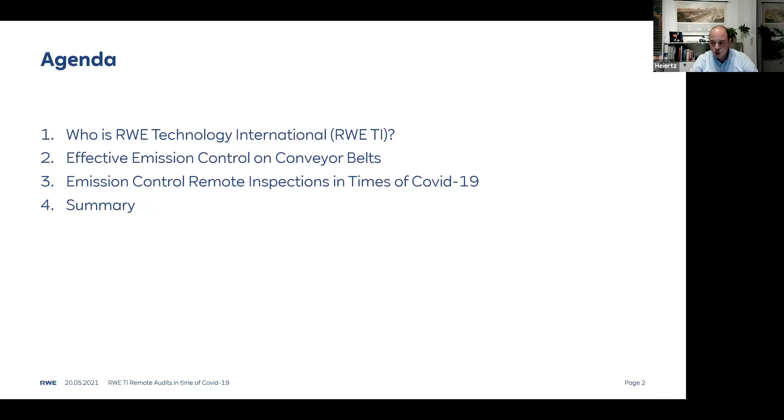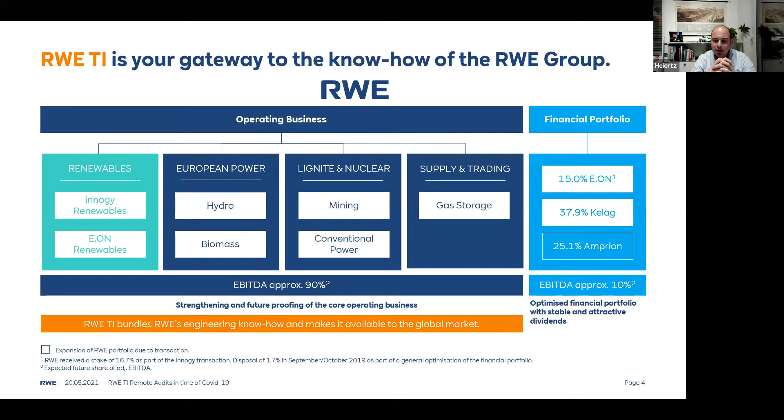This orange bar, RWE TI, that's RWE Technology International, the global consulting arm of the company, bundling all the knowledge of the complete RWE group for international projects. Mostly external clients, but also internal clients like the RWE group itself. In the mining business, it's 99% external clients. We've been serving since 1965 already, mostly the major miners in the market.

Of course, we also have a big maintenance center here. The maintenance center, it's a mechanical maintenance center, which is responsible for the complete maintenance. In this maintenance center, we are also producing products for the Chilean market. Big ultra strong drive pulleys, which are manufactured there, wear protection systems. We have several clients in the Chilean market who are served by RWE with RWE mining knowledge or consulting knowledge, but also with RWE equipment, where the equipment then is manufactured here in this big maintenance center as well.

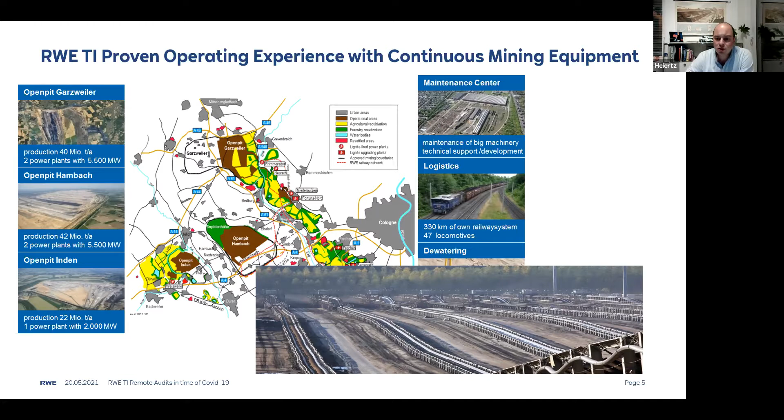These are technologies which are, I would say, very environmentally friendly. With these technologies, you have a good chance actually to reduce your carbon emissions in your mine, to reduce your carbon footprint, to reduce the dust footprint. So these are really good technologies which are getting more and more popular right now. As the deposits are getting deeper, you need to look for new haulage ways, new haulage technologies, and to make the mine more cost efficient. And these are the technologies we are consulting on.

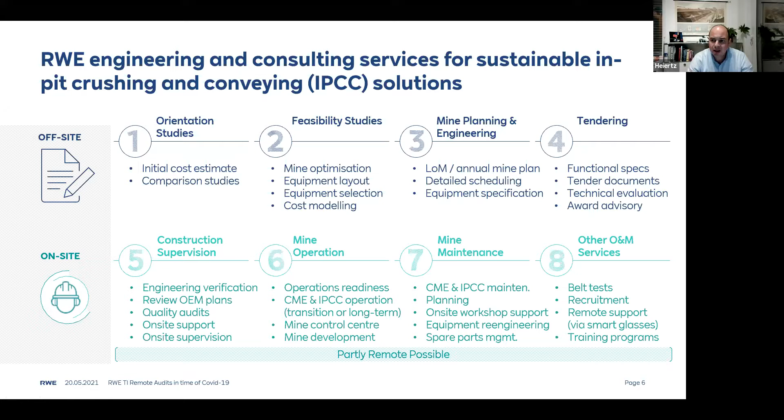So on offsite, we're doing all these types of studies to help the clients to implement things. And then on onsite, we're also doing a lot of construction supervision, mine operation, mine maintenance. For example, here we are with our team, we are quite often in the Chilean mine operations where we're working in to support the mine operators to handle their equipment actually, or to maintain their equipment.

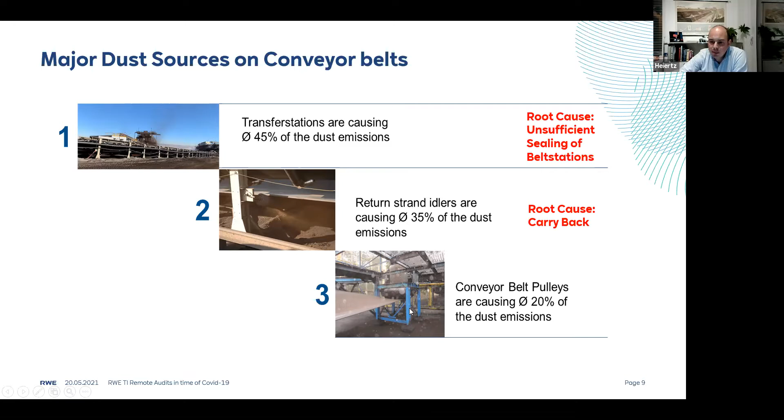The third cause, maybe 20%, are conveyor belt pulleys, also causing a lot of dust emissions. This picture was taken in an operation in Brazil, where we did an audit on conveyor belts, and the root cause here again was carry back on the conveyor belts.

In Germany, we're talking about 2 different ways. We're talking about emission control. That's a preventive measure, where you are eliminating the dust source, and you're talking about immission control as a corrective measure, so you're reducing the effect of the dust on the surrounding environment.

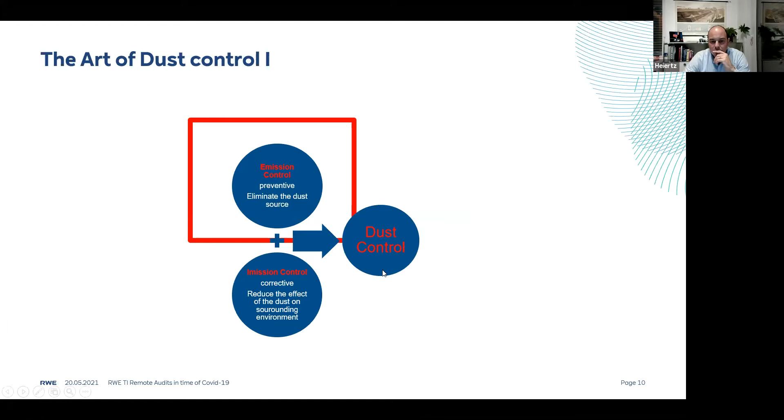And what we are always trying to do, and that's by far the most important and the cheapest way to optimize your dust emissions in the operation, is the emission control itself. It's very, very important that you eliminate the dust source on the conveyor belt. When you control the dust source, you're saving a lot of money on further corrective measures you have to take. And this is the best and optimized way to deal with your dust emissions.

So, as I said, avoid that dust is created. If dust is created, there was a saying I heard many times: a lot of water, for example, helps a lot. And I know, especially in the Chilean operations in the Andes Mountains, fresh water is always a problem. It's always difficult. It's very expensive, the water. This is why we are going with this low water approach into the project. We're trying to use a minimum amount of water with a high surface area to collect the dust.

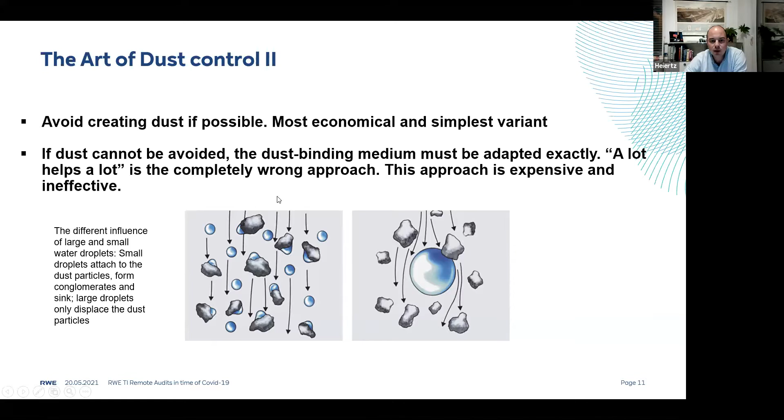As you can see here, when you have a big drop of water, the big drop just drops away from the dust particles. When you have very, very fine water droplets, the water droplets are adhering to the dust particles and bringing the dust particles down. So that's a very, very efficient way for waterborne dust control.

And here you can see, I took this picture, a pretty much optimized transfer station on conveyor belts. You have a nice portal, a properly sealed transfer station with very, very fine nozzle systems using a minimum amount of water, and you have high pressure belt cleaning systems, for example. You have side sealings, you have proper scrapers installed. And this is how it looks after the engineering process.

In the engineering process, that's a designed transfer chute, also for hard iron ore material. And this is a chute which can be nearly dust-free. You can make really dust-free chutes when you make it correctly. So we are involved in this engineering process for these companies. And what we saw there, we can reach a lot of optimization when you put a little bit of work into this topic.

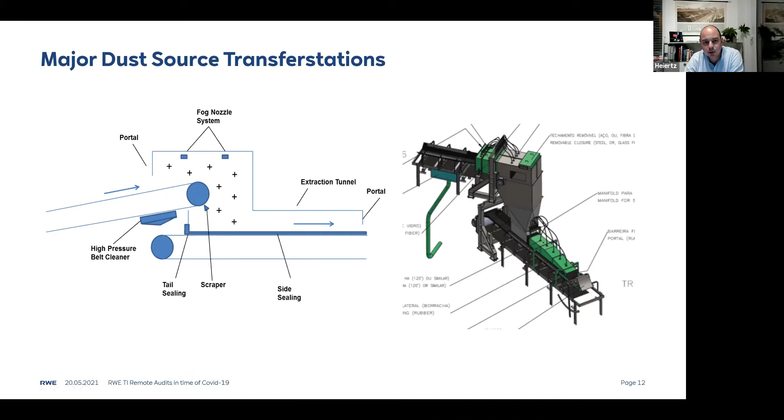So as I said, the minimum amount of water is required. When you see these nozzles, one nozzle has a water consumption of, let's say, 3 to 4 liters per hour.

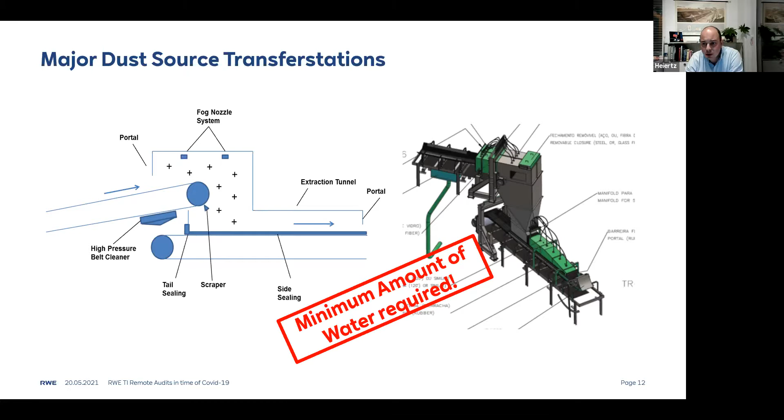So that's a minimum amount. We always know that water is really precious in arid zones and arid areas. So we are really trying to minimize the amount of water here.

That's another topic. One of the major topics is carryback on the conveyor belt. These are pictures I took from our own operations here. When you see this long distance conveyor in one of the major mining companies, you see this diffuse dust which is coming out of the conveyor belt, and how this is created.

What's the dust source? When you see the material flow here, the material is running off the belt, then you still have a little bit of material which is scraped off by the primary scraper, and they try to scrape it off with the secondary or tertiary scraper. But most scrapers are actually not able to clean the conveyor in a proper way. You still have 0.1 to 0.3 millimeters of carryback material still adhering to the conveyor belt.

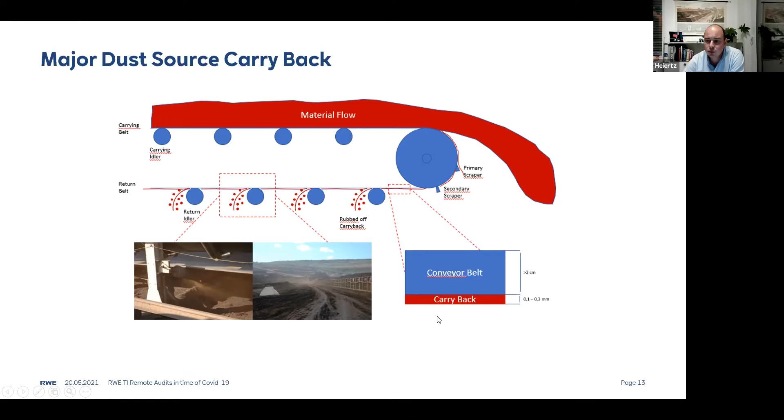And this material is rubbed off by every return strand idler on the full conveyor length. Sometimes with tunnel conveyors, or huge conveyor installations in the Andes, you just see this long fleck of dust coming out of the conveyor strand. And these are things which can be further optimized to reduce dust emissions to an absolute minimum.

One topic here is a thing we invented within RWE, a so-called high pressure belt cleaning system. It cleans the rubber of the conveyor belt to nearly 100%, so that all the carryback material adhering to the belt is cleaned off by a very, very sharp water blade.

It does not harm the conveyor, and it doesn't matter what the structure of the conveyor is, or if the conveyor is worn out, as this sharp water blade is very flexible. And we had very good results cleaning the conveyors and really avoiding major dust emissions in that field.

Coming to the actual topic, remote inspections. Here's another picture; I really like to use these aerial photographs. That's another picture from the Hambach mine. On the first pages we looked from this side, now we are looking from the other side. This is one of the major mine operations, with 130 kilometers of conveyor belts installed.

You can see the conveyor belt distribution point for the complete material haulage and material flexibility. So you can imagine we spend a lot of work optimizing all the conveyors here. The conveyors are running at 7.5 meters per second with a conveying capacity of 38,000 tons per hour. These are really large scale and quite expensive conveyors, and it was a major task to keep them running all day.

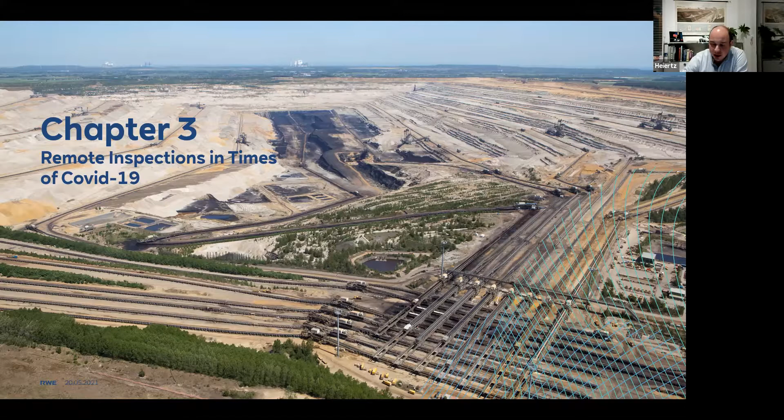But due to the global pandemic crisis, we were not able to bring people on the ground, for example, in South America. It was very difficult to bring people to Brazil, and the client needed that help from our side. We told the client, yes, we will definitely help you, we'll look for a solution. And this is why we were choosing the remote inspection technologies.

Normally, the way to optimize a conveyor is a three-step approach. We start with the inspection, normally an on-site inspection where our people go into the mine and optimize the operation. Then we have an engineering optimization phase together with the client, where we further optimize all the equipment. And then, if required, we have a training phase to train the employees in how to have optimized dust emission control.

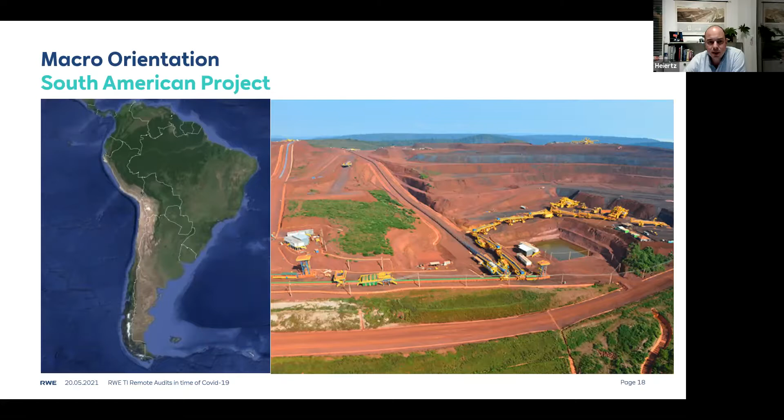Maybe to show you this macro orientation, here we have a major iron ore operation. That's a mine. Then here we have a conveyor belt distribution point. And here we have about 12-kilometer long distance conveyor going here to this usina, to this process center, process sieving, screening facilities here, intermediate stockpile, and then we have a train load out from where the material is transported about 850 kilometers to the major harbor in Brazil.

So that was one of the clients where we did this inspection. The client asked us to go to Brazil, and we said, no, we can't go due to this pandemic. It's not possible at the moment. The risk for the employees is too high. And this is why we said, let's try to get these smart glasses into the country and to test, to have a real approach with a remote inspection here.

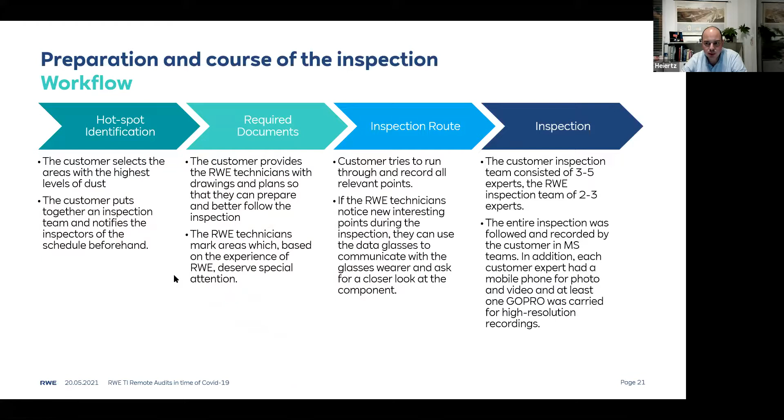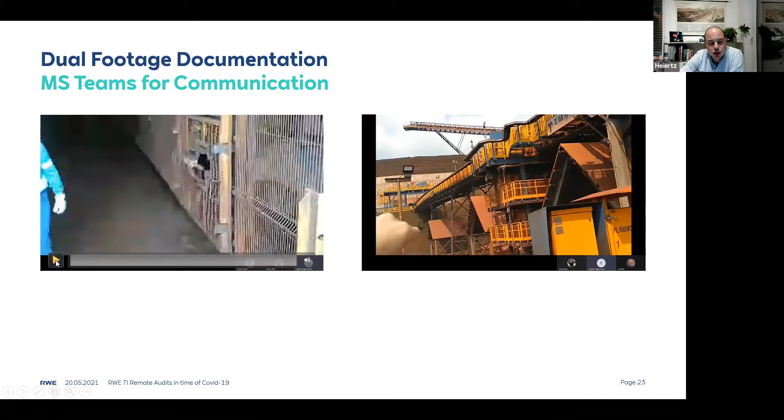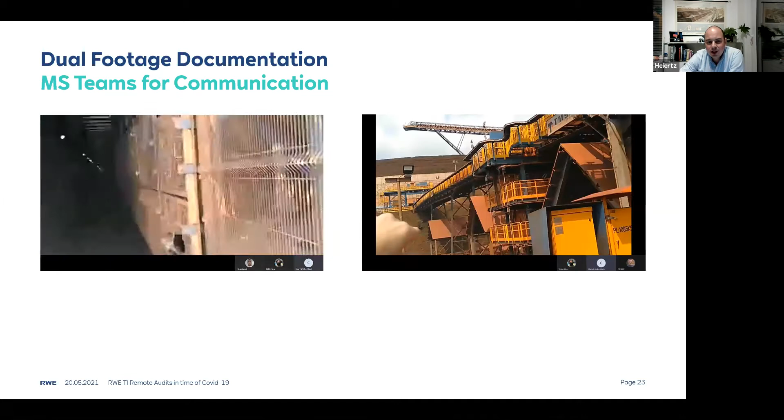So, as you see, sometimes when you have a bad reception, you don't see that much. So it's very, very hard.

Can you identify any problems here? It's very, very difficult actually. Sometimes the low resolution pictures from this remote inspection just give you a certain orientation of where you are currently looking at. That's another picture, and you hear a voice, but actually the whole picture is completely frozen. So you don't see, you just hear the voice. You can have a rough orientation, but you can't see any details here because due to the bad reception, the picture is frozen.

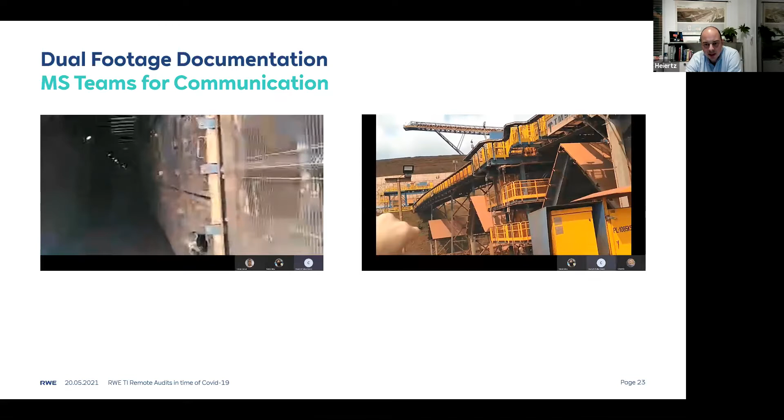And what did we do? As I said, it's very, very important that the client also uses a GoPro, a 4K system or high definition system, which is also included in the camera, but we use an external GoPro camera here. Then in the evening, we always downloaded the data. That was gigabytes of data coming from the client, and we tried to check the data for inspections. And here, when you see that, that's a much better picture.

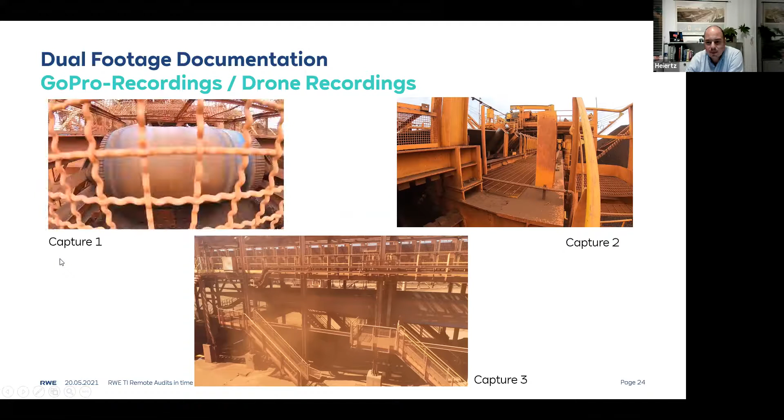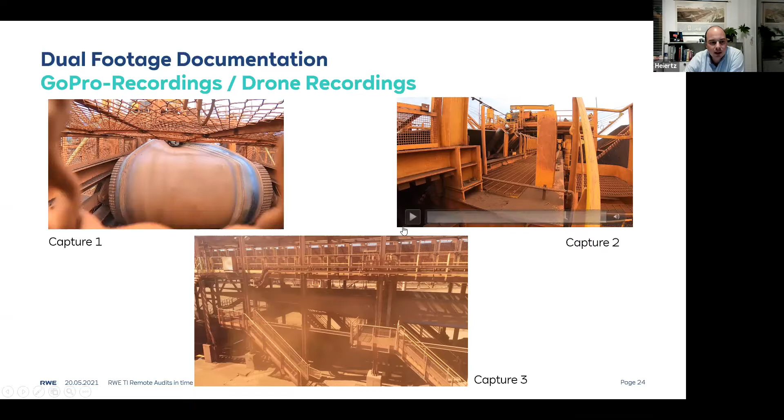This is where you can identify the problems. Here you can directly see the problems, that a lot of lumps are brought into the drive pulley here. Another problem, that's the same situation just from one side, where you can see a massive offload from the conveyor belt, which hasn't been inspected by the client itself, but that's something we saw actually just by using this GoPro. Sometimes we even used a drone.

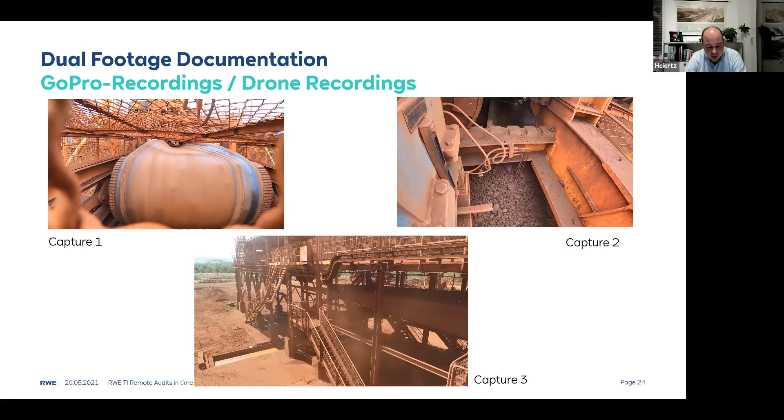So the client was also using a high definition drone. That was a recording from the inspection route, where they used the drone just to identify the dust problems on the conveyor belts. And here you can see very clearly a lot of carryback, a lot of offloading of material. And these are the things which are really creating a lot of dust emissions in the operations, pretty much.

So, yeah, so that's so far the overview about the remote inspection, just giving you a summary about that presentation.

RWE actually is a highly specialized consulting firm for continuous mining and IPCC, in-pit crushing conveying projects, with vast experience in maintaining conveyor systems and also optimizing the emission controls and emission control measures.

So good preparation is very, very essential for proper remote inspection, a structural approach with good customer preparation. That's very, very important that you really prepare that presentation in a very good way. It's very essential that you have a good 4G connection or industrial Wi-Fi for stable communication. That's actually desirable, not always possible, depending on the situation where you are, on the spot.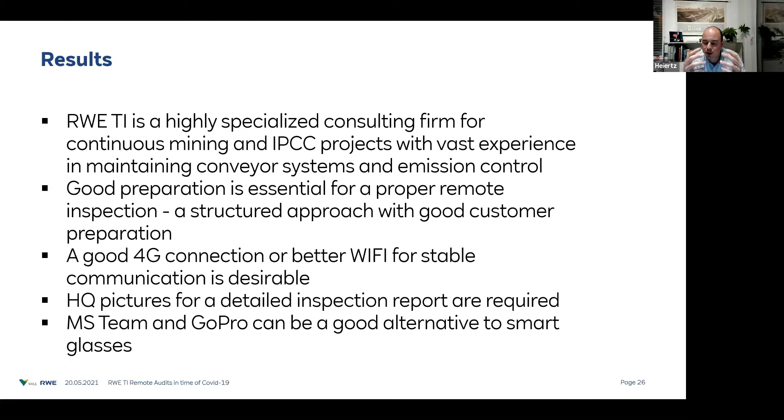So this is why we're also using these GoPro cameras for further assistance. Then high quality or 4K pictures for detailed inspection reports are also required. MS Teams and GoPro can be a good alternative also, or in combination with smart glasses. So for this inspection route, that can be a good way to have good communication between consultant and client.

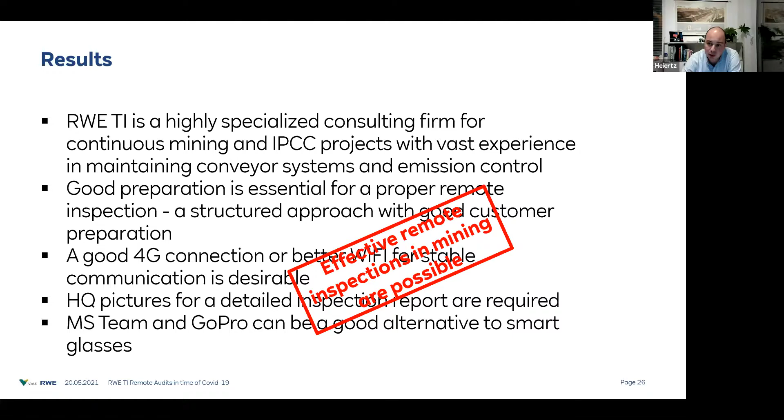So at the end of the day, we can say, after we have done this now for some time, effective remote inspections in mining are possible and can be a good alternative to normal inspections. Of course, we prefer the normal inspections as you get a better overview, but in this very difficult situation like pandemic times, whatever, that can be a good way to help the clients solve their problems at the end of the day. Yeah, that was the result.